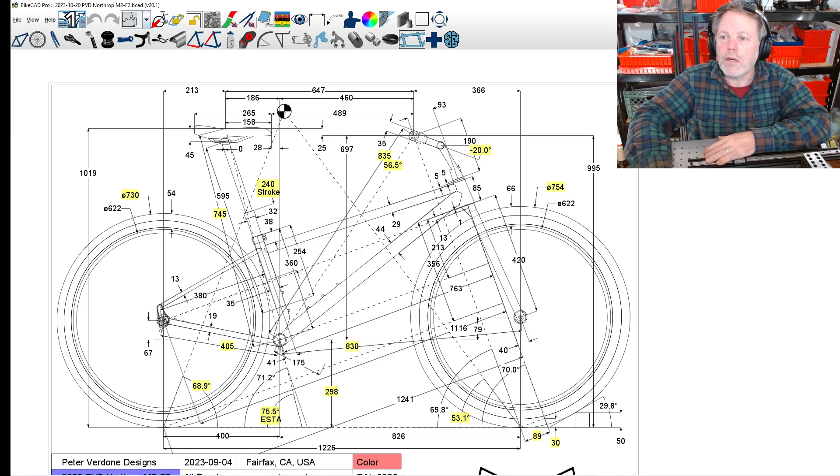We can use BikeCAD to build a bike. For your fairly traditional commodity level bikes or classic bikes, those aren't going to be too tough to work from a basic 2D print for. The problem starts, especially in the modern era, where we're talking about a lot of 3D printing and odd shapes of things compared to what has classically been done.

When old folks talk about level top tubes, it had nothing to do with the bicycle. It had everything to do with manufacturing and how to have an economical set of lugs that would work in various frame sizes, and keeping the top tube level helped with that, and generally made it so that you didn't have to do much work on the factory end.

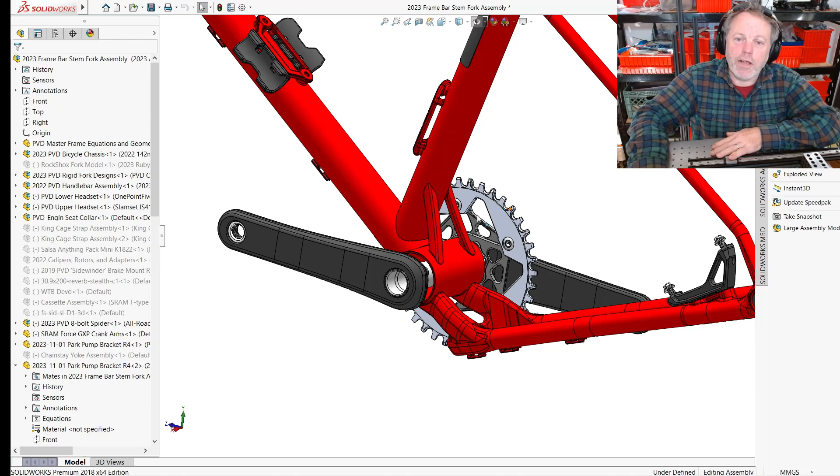But everything gets crazy in the modern era, especially with welded bikes or fillet brazed bikes. And we have to meet up with some various things, especially mountain bikes. So yeah, if you're doing sweet fixies, then you don't have much hard work, or even classic road.

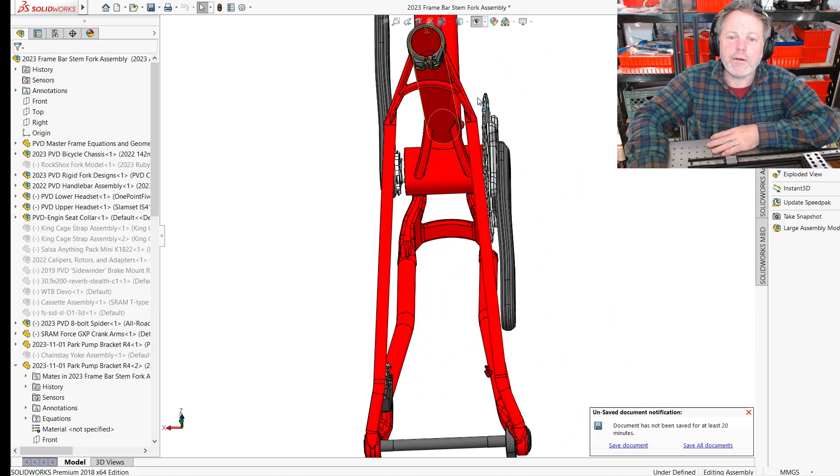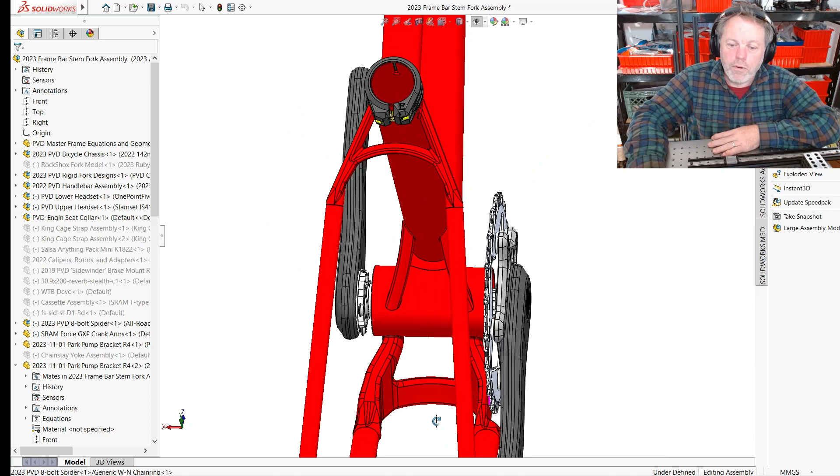There's not a lot of hard work, but we start getting into very high clearance situations here in that chainstay yoke, where I'm trying to make a lot of room up here and minimize the space it takes up, but I need to clear the tire over here. And same down here, I need to clear the tire, but of course we have a chain ring and we need a little space for the chain and crank.

It's like, why do we have that S-bend type thing? We have a crank out here that needs to clear. And so we end up with these rear ends that are pretty funky.

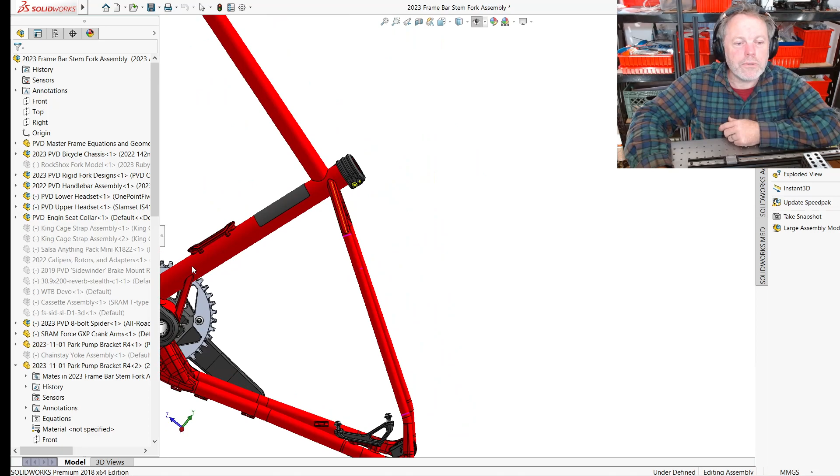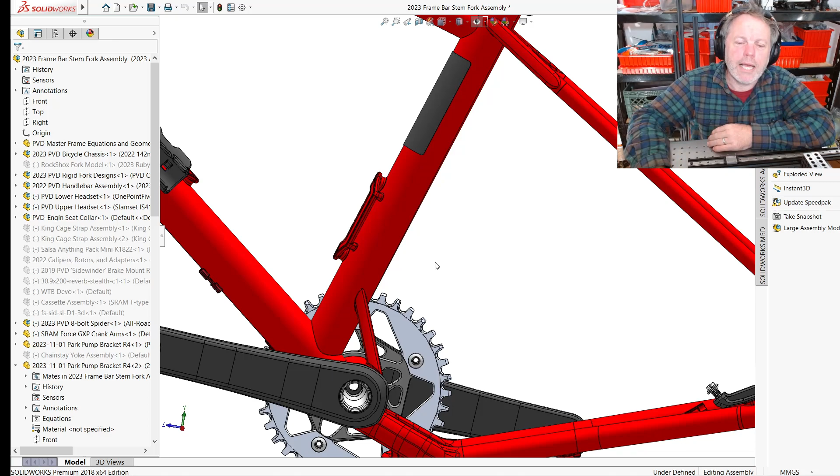Front ends are pretty funky too in a modern bike, where you can see this is an all-road bike, nothing too extreme in my world. And we have this real offsetting intersection at the down tube type thing. Previously, I'd done bent tubes, and that would bring that tube back into the bottom of the crank shell. But we're doing this now to improve even more, or get even more dropper insertion space.

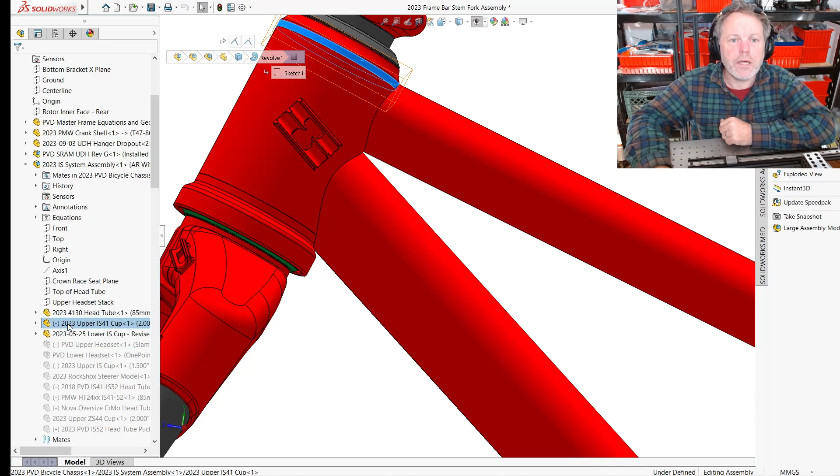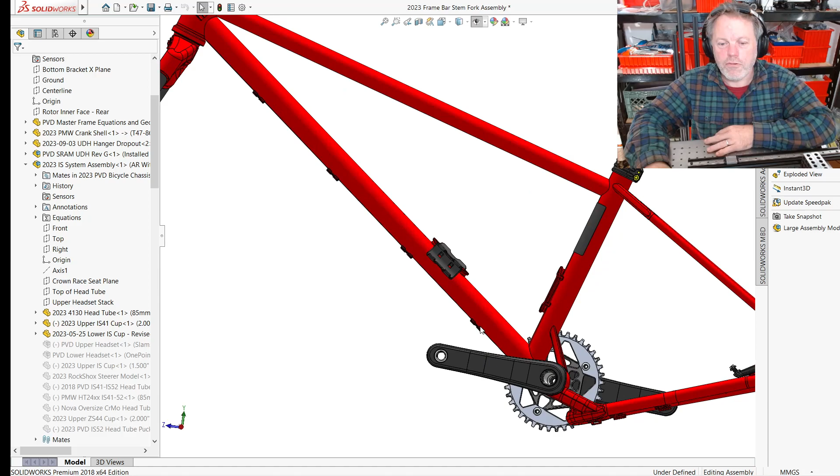And we have a very small head tube. This is a modular head tube with various parts there, so that we got a top cap welded in. It's kind of Yeti style in terms of the construction, modern Yeti, and into an IS type lower. So we have some trickier situations, but nothing's too different from a frame building perspective.

We're going to put it on there, and we want everything—the center line of the hub and the center line of the bottom bracket and the center line of the head tube and the seat tube—all to be in plane. That is the big goal.

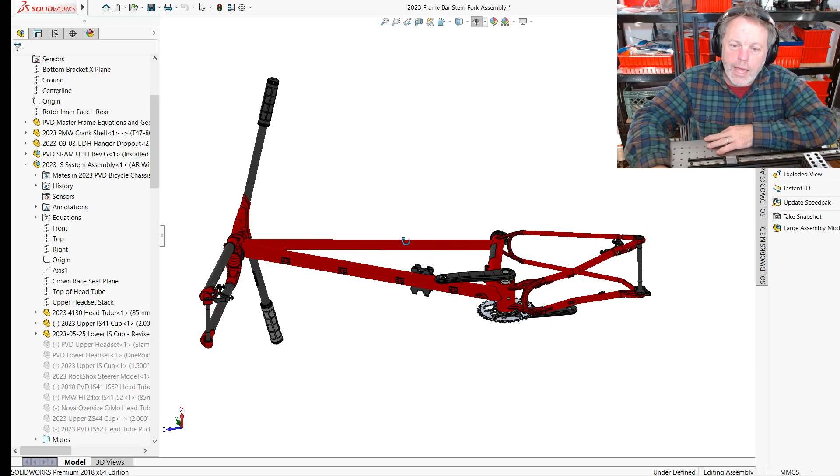And that's our goal. And this is a tricky one when it comes to bike design, because we strive for that. People talk about the perfectly aligned bike and everything like that. And it's like, that's great. The bike is in perfect alignment until you push down on the pedals. And at that instant, the bike is no longer aligned. So we have a lot of myths that are out there regarding what is important on a bike.

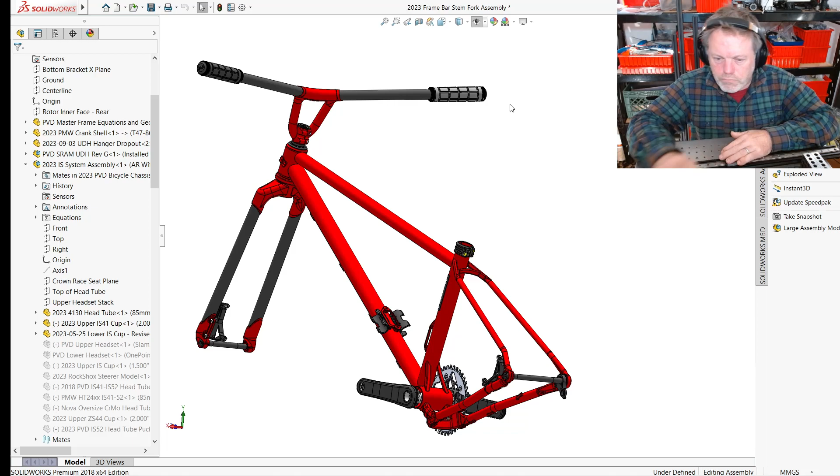If the seat tube is cocked weird, you're going to end up with a weird saddle position always, regardless of the sway in the bike. But especially with mountain bikes, this clearance issue becomes very important, because that tire—we're managing a lot of things.

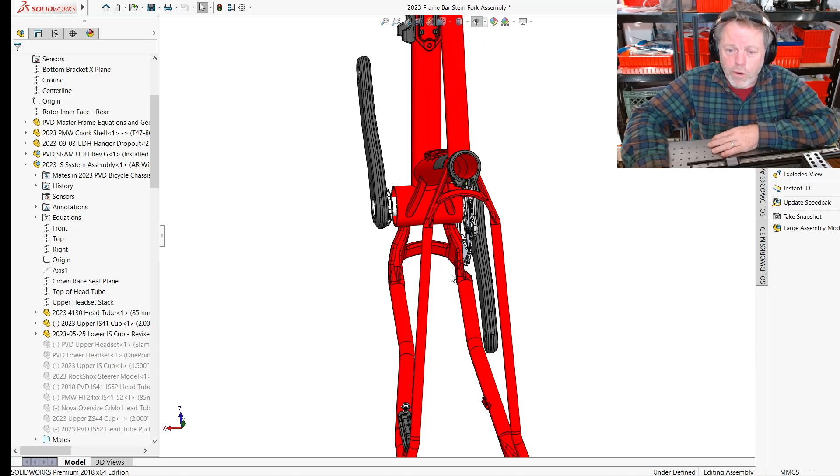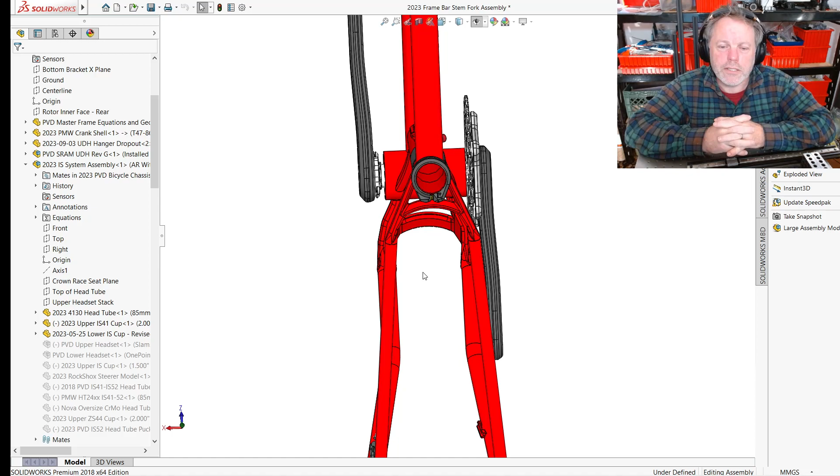Here I've got a Q150 crank and I'm trying to run 2.3 tires and large chain rings, up to a 40 tooth, for clearance on that chainring. My legs are big and fat, which is one reason I have all this clearance. We're cutting it really close on a high performance bike—trying to get the most we possibly can in the tiniest space, and any deviation can cause real problems, as anybody who's built a bicycle frame knows.

So we need to be able to hold tubes, and hold them solidly. It's good to have 3D models if you're doing wacky or differing bikes, because just figuring out some of this stuff takes a lot of work.

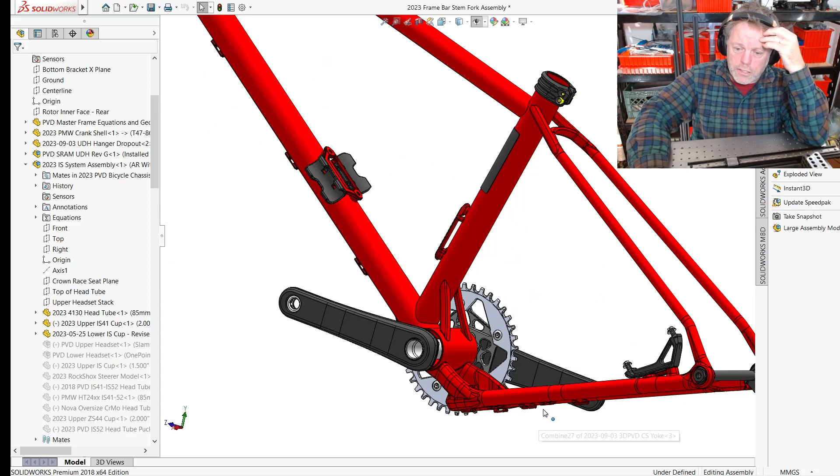I have a master frame equation setup—these are all equations driving this frame. It gets built numerically from those, and then it has independent part files needed for production. You can see we have driving parameters that lead to driven parameters, and the same thing happens for the fixture, where we need to make sure we're focusing on the right ones.

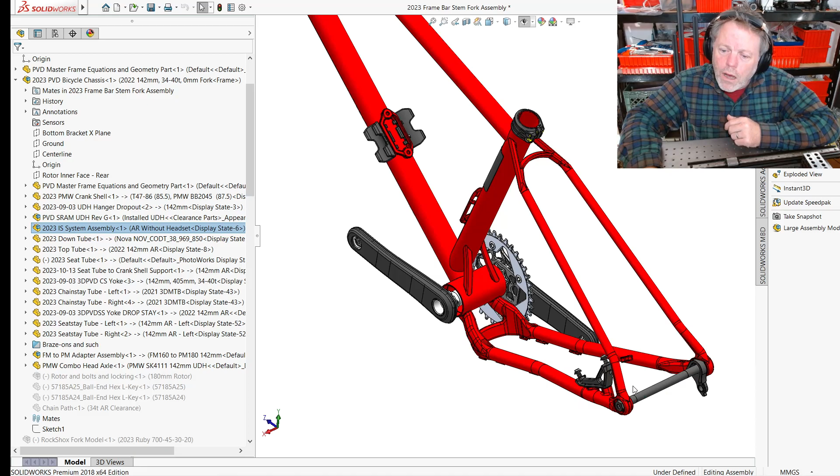Let's see what else we need to talk about. Oh, we also have some other cool stuff back here. We're in the world of the UDH dropout, which means we have a 7 millimeter offset on this side of the hanger from where our hub end is, plus various clearances.

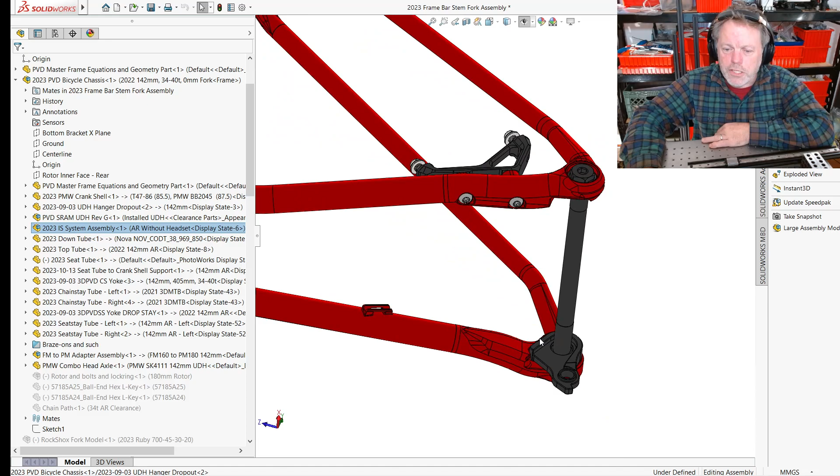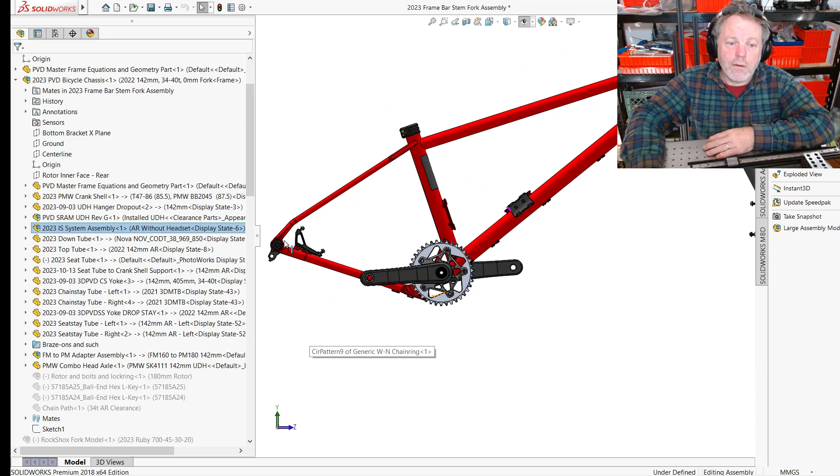We also have what's called the clocking of the hanger when we put the bike together. Let's see which button does what... okay, there we go. One thing a lot of people kind of gloss over is clocking of the hanger.

UDH defines the location of the clocking fairly well, which is nice. Earlier or other types of dropouts require a bit more work. If you drew a perpendicular line from the bottom bracket to the hub axle, and then a line perpendicular to that, the SRAM spec is 8 to 10 millimeters rearward—this hole should be for mounting the derailleur. That's something more people should take a look at and be aware of.

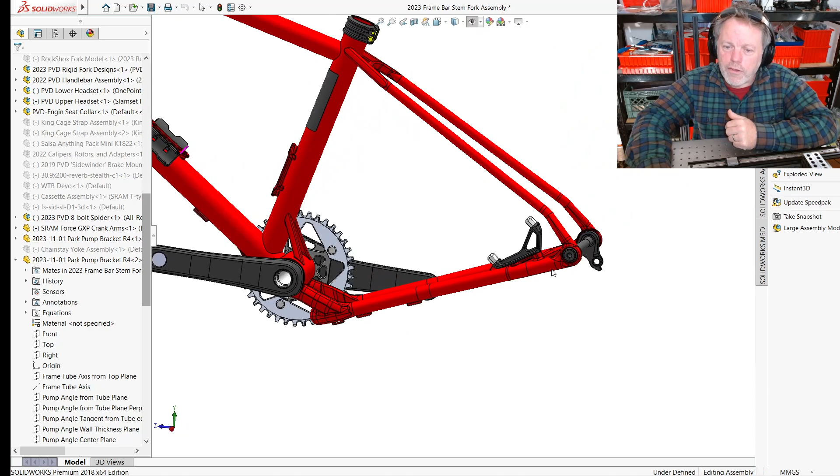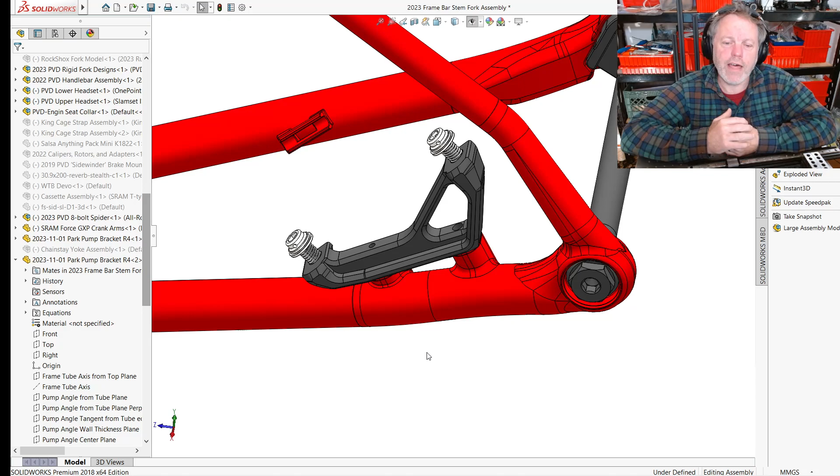We want to think about that when it's on the fixture—that's definitely something that happens there. On the other side, this is a 3D printed dropout with provisions for caliper mounting. Some amount of brake fixturing can be done while the bike is in the fixture, so having ease in that regard while it's fixtured up is very helpful, and working with sub-assemblies can help.

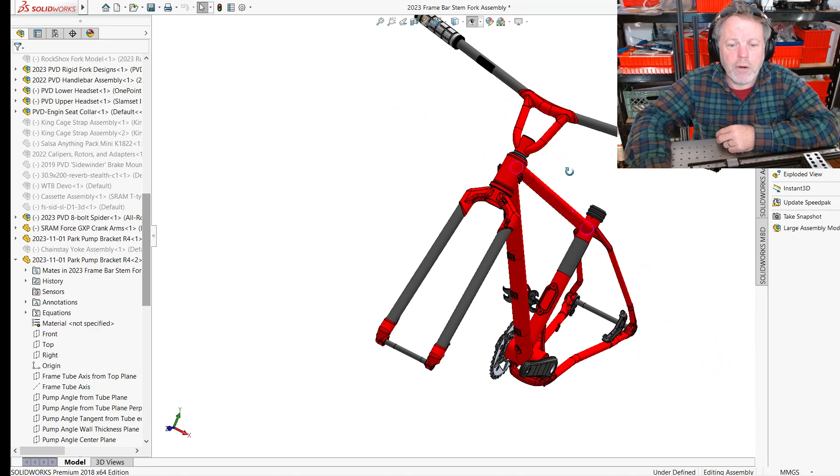I don't know, there are other things I could talk about—fork fixturing and handlebar fixturing—when we get into fabricating those types of things, but those are a little different.